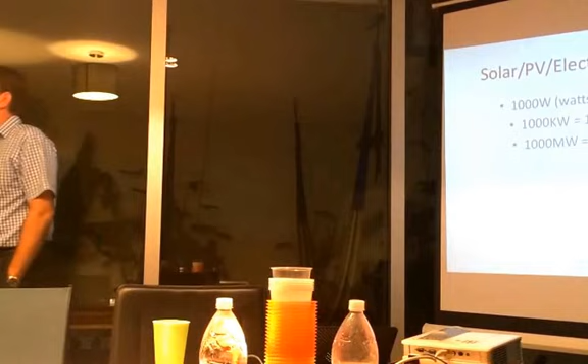What about the ones that have the little white ring underneath? There's different ones - they're assembling the panels, because there's a lot of companies that buy the parts in. The 3 biggest companies for solar panels in the world right now are all Chinese. And it's funny, I have this conversation with people about quality.

We highly recommend Yingli. Did anyone watch the World Cup? You see all the advertising for Yingli - they're now the number 1 in the world, and they have extraordinarily good quality control. I mean, really good, superior to anything else we've seen.

I was with a client the other day, and he told me he uses a Mexican company, very good, solid tech. I didn't have the heart to tell him that the actual bit that's making the energy is made by the Chinese company, and it's assembled here into a panel by the Mexican company. But the price, it's amazing how it's come down.

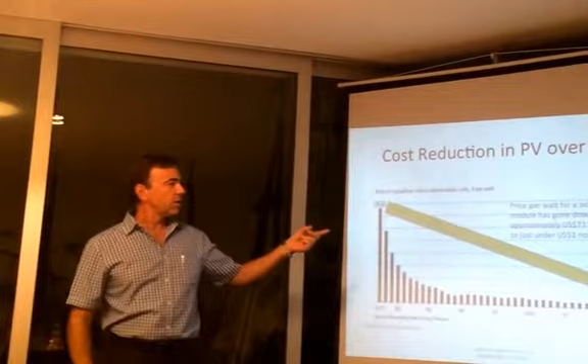It basically went from about $77 per watt in 1977, and then it took an absolute tumble as more investment and the market expanded, and we're down to about $1 a watt today for the panel only. Global PV stands for photovoltaic, by the way - it just means solar, but it's the process.

By the way, one of the myths - I put some of these in our little brochure here - a lot of people, when you mention solar, they think that's for heating up your water. And there are actually little things you can buy for that.

You can buy them at Home Depot and a few other companies supply them, which will heat up your water. But who's bathing with hot water at this time of year? It's like, put some ice in the thing.

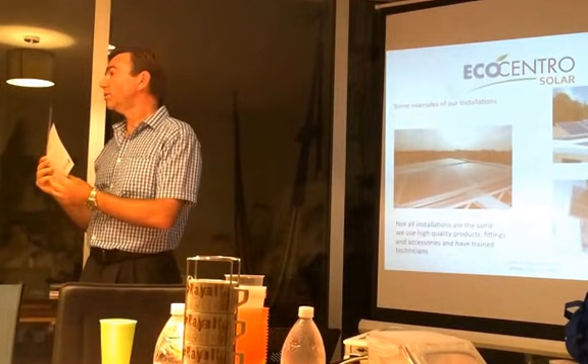One of the reasons we use this company so much is because they're very programmable, you can adapt them, and they're very robust. It's German. Can you move it? How is it to install? Can you move it from one place to another?

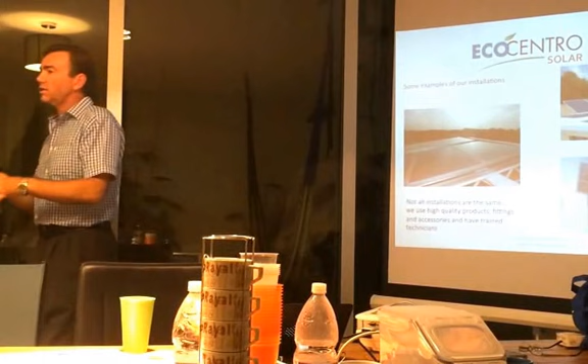You can. The installation isn't permanent, let's say, but it's semi-permanent. In these cases, we put little concrete bases to hold the anchors in because we don't want that hardware sitting in a puddle of water, so we take steps like that. But for example, I've got a client right now who is actually similar to your situation - she's in a penthouse.

She's locked into, and wants to be locked into, a contract for 4 years rental. And she's in exactly that situation of what can I do? What are my costs if I don't stay after 4 years? Well, there's 3 different things you could do.

One, if you own the property and you were going to sell, you could sell it with the equipment installed, and all the warranties are transferable to the new owner. Number 2 is you could take it with you, because most people are in love with their panels, kind of a kinky thing. So they can.

And you can take them with you, and what you'd have to pay for is we'd come in and dismantle, we'd use as much of the stuff as we could in the new one, and we'd have to do a reinstall for you, so there'd be a cost involved. The third option is the person buying the house doesn't want it, but you could sell it to somebody else. It's a commodity. Panels really are a commodity, like an AC.

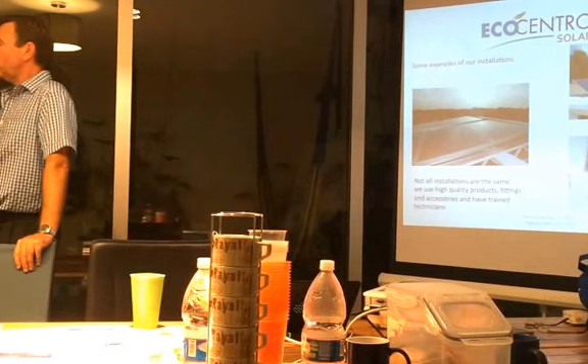But with a difference - what happens with ACs, for example, you've heard of this inverter technology? With the mini splits, they're inverter, much more efficient, but it costs quite a lot more than a regular mini split. So over time, that air conditioning unit is basically becoming less and less efficient. I can't tell you how often we go into a home and hear the AC laboring away, and it's like, you might want to get rid of that piece of junk - it's like driving around in a car from the 1970s that's guzzling gas, whereas a more modern car has a lot more efficiency.

But the panel is not going to be that way. The only thing I think we're going to see over time is maybe the dimensions of something that's a 250 watt panel today will be smaller. But I think it's stabilized so much in terms of things - this is a question we get a lot, shouldn't I wait till the technology improves? I say, well, the technology is not going to improve as much as the savings you're going to make while you're sitting around waiting to decide whether to buy. So if you buy solar now, and another person doesn't buy for 2 years, the money you've saved in those 2 years more than displaces the difference in technology we might see 2 years from now.

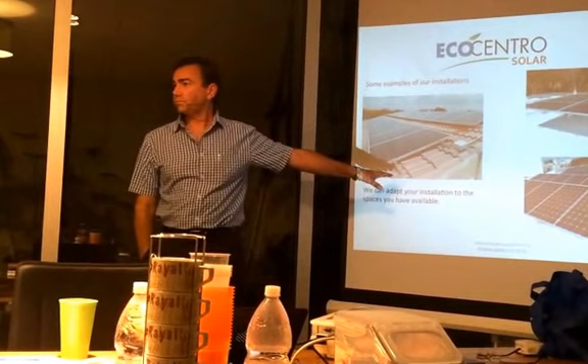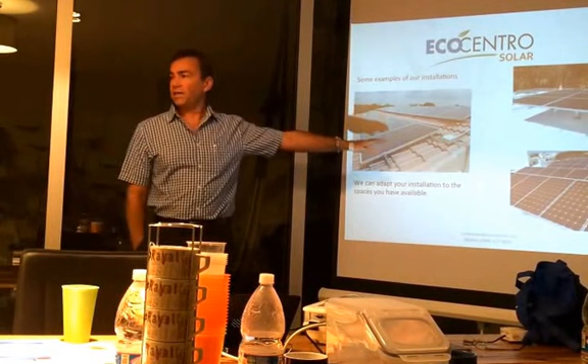Okay, so I just want to show you another couple of installation types. Here, what we had is a flat roof, an inclined roof, tiled with concrete tiles. This particular client's major concern was hurricanes - I'm not going to get up on the roof, I'm not going to do anything in a hurricane. So we went for what's known as a flat installation. It's not actually flat, it just means the panels are flat on the rail. This actually has somewhere between 6 and 8 degrees of inclination, which is pretty perfect here.

In the summer, our relative position to the sun is such that the efficiency of a flat installation in the summer is actually higher than angled. Where you lose a little bit is in the winter, but this is a person who doesn't use their air conditioning in the winter, so it's kind of the best of both worlds.

And then here, I just want to show you this one, because what you see here, if you've got sharp eyes - and I'll show you another slide on this - is 2 different panel types. You may have heard that there's single or monocrystalline, and the one that looks like a diamond shape on it, that's the monocrystalline. Years ago, they had a much higher efficiency rating than the multi.

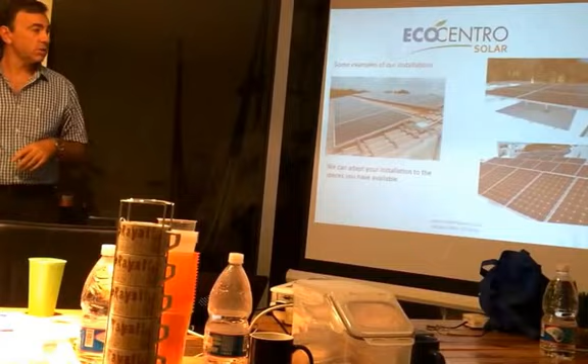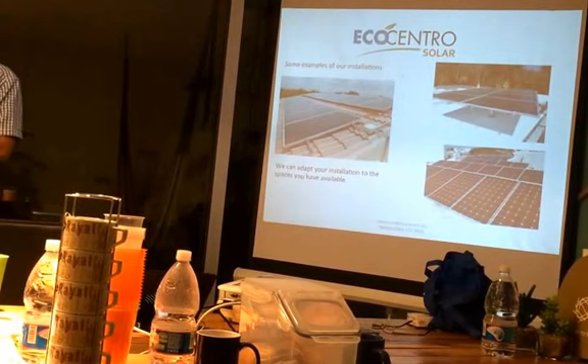Today, they're within about 1% of each other, but the price difference is still significant. This is a very efficient way of mounting, but probably the least protected in the case of strong wind, because it's a single mount.

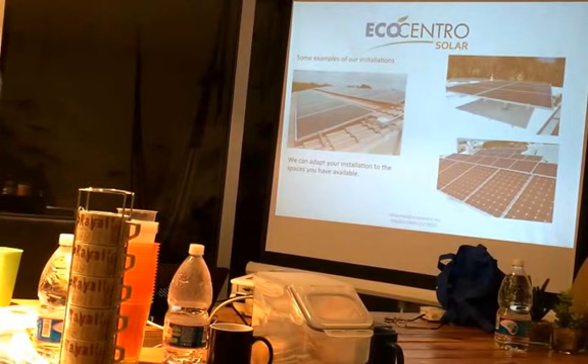What's nice about it is you can get a lot of panels very close to one another without having to leave gaps, so it's a very efficient use of space. Aesthetically, it's very nice, and the angle can be changed very easily.

A lot of people ask what the hilos are. Hilos are phases, okay? Each phase is 127 volts in a perfect world. If you're on a single phase, you don't have 220 in your house. So most people have 2 phases at least, which gives you the ability to be connected at 220. You'd think 127 and 127 would give you more than 220, but actually it doesn't.

If you ever get a bill that you think is totally outrageous, the first thing you should do is go down to the meter and read it yourself. Maybe they've done an estimate, or maybe they've misread your bill. Maybe the guy reading your bill was hungover, who knows. So that would be the first thing to check.

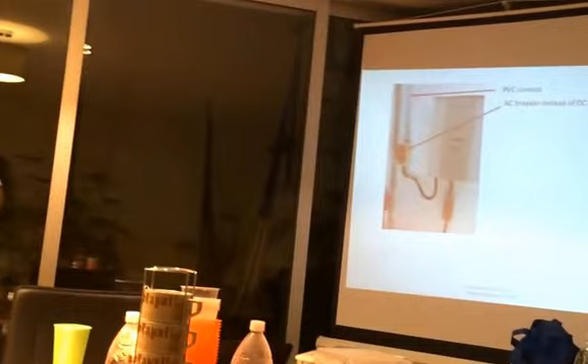They used an AC breaker box, which is one of the things I mentioned, and this is very, very common. Without getting too technical, AC, as you know, oscillates, passing through zero a lot at 60 cycles. So when you break the circuit with a breaker, it only has to go a relatively short distance because it's an easier thing, and it doesn't have to do it particularly quickly. It takes about 25 microseconds, something like that.

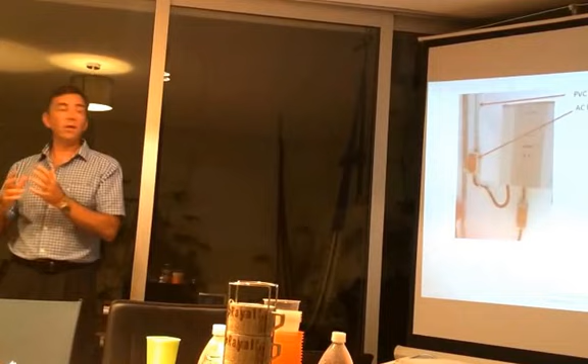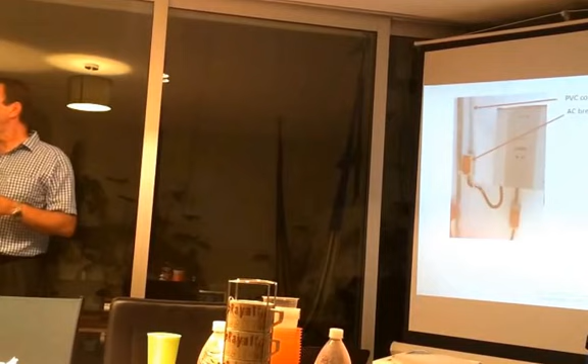But DC doesn't do that. DC runs constantly at whatever voltage it is, and this could be 300, 400 volts. So when you switch it and don't do it quick enough, you can get an arc, and if you're the one switching it off, you might have a nasty surprise. So this should be a DC disconnect. The reason they don't put one is a DC disconnect costs a lot more, and it's very difficult to get unless you're a professional solar company with them in your warehouse.

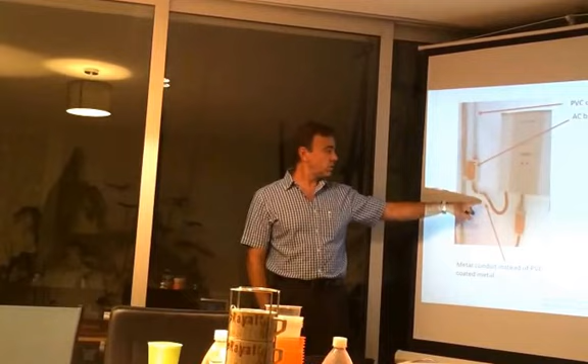Then, this should be galvanized. Here they've just used metal, but it's not coated. It should be coated with PVC because you can see it's all rusted, I don't know if you can see from this picture. So that's not good. This is inside the box.

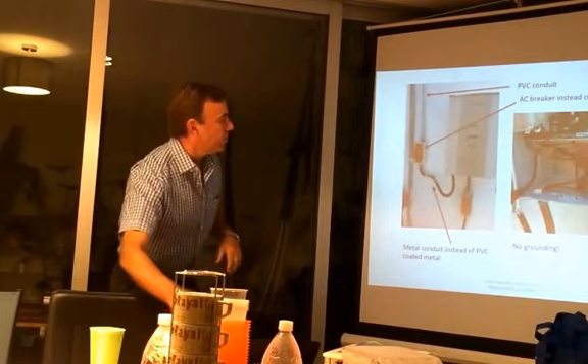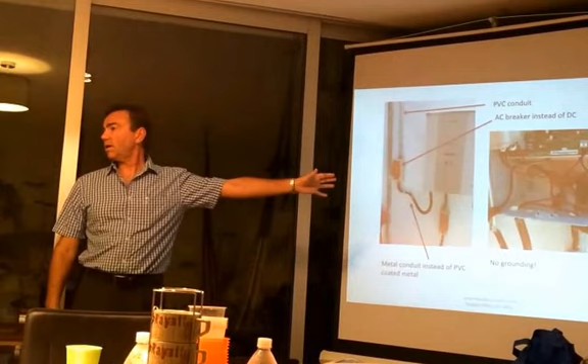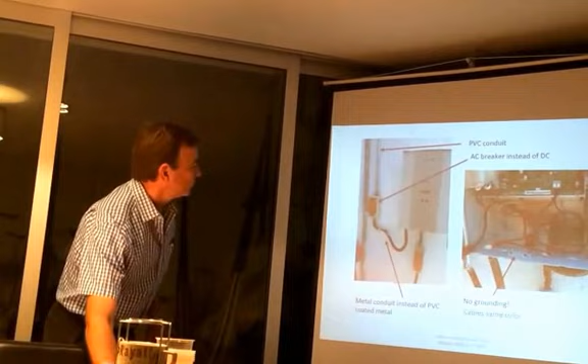And what we have here is the AC side and the DC side, but how the hell can you tell the difference? Because they've used all the same color wire. And to make matters worse, they've done no grounding whatsoever. So basically if there's any sort of short in the system, this box is now live. It's a metal box, so it could be really interesting because you get AC and DC together. The cables are the same color, so you can't tell which is positive and which is negative.

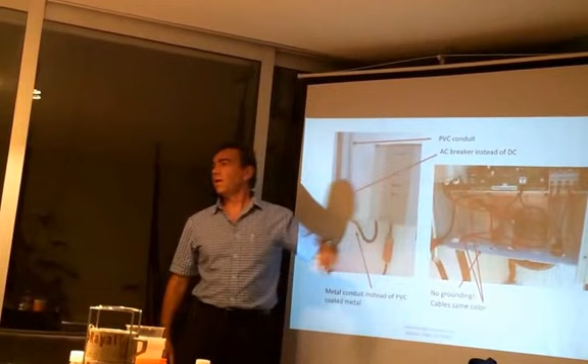Oh, but they put a little bit of insulating tape, so luckily we can tell. By the way, no criticism of Mexican electricians. As I said, I've lived here 30 years, I love Mexico, my wife's Mexican.

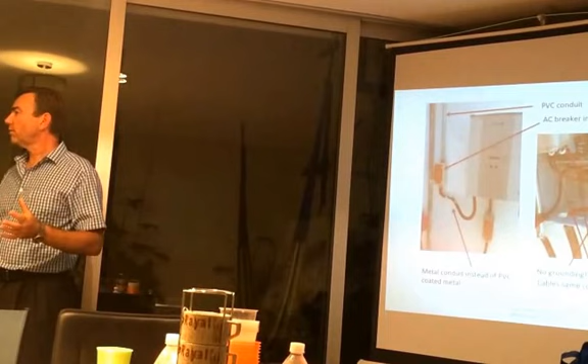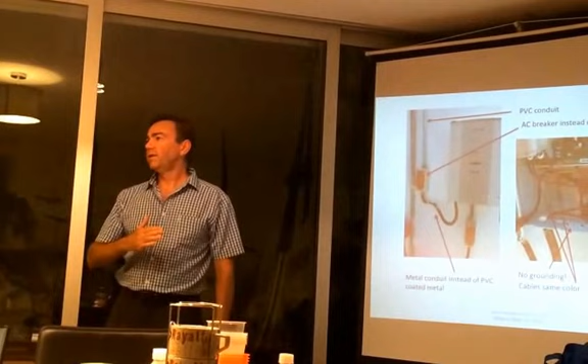But have you ever bought a fan and had it installed? You know, it comes with those little special things for connecting wires together. The very first thing the electrician does here is throw those away, because much better: strip the wire with a knife, tie them together, wrap around, you're good. Well, not so good, but really, really bad in DC. You do not want that sort of thing in a big solar array.

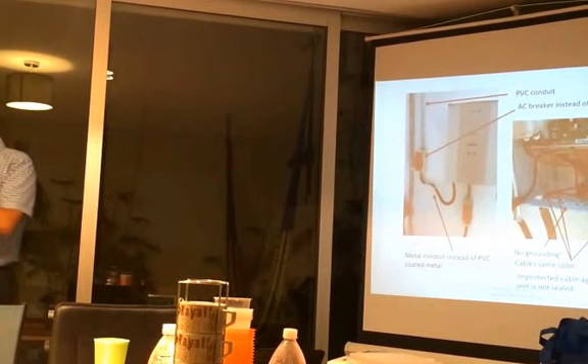Here they've put the cable directly into the box, which has a metal edge, so it's going to move over time and rub through. And when it rubs through, now you're going to have the box live. It's going to be very interesting.

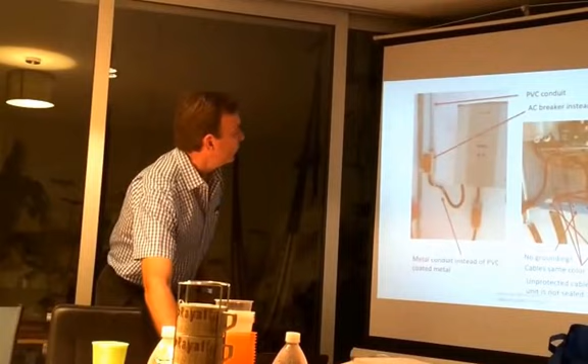All right, here's a few more installations of ours.